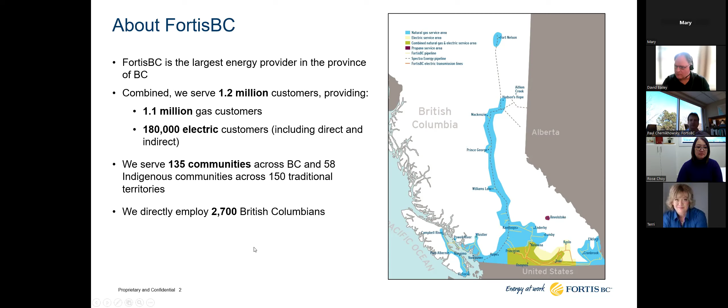So conveniently, FortisBC is both the gas and electricity supplier for the Kelowna area, and that gives us a unique insight into energy use by the customers in Kelowna. If you're not familiar with the city, it's about a 4-hour drive northeast of Vancouver, in southern interior BC. Not a huge city, but with a population of just under 150,000, it's still the largest urban area in the BC interior. All the electricity used in Kelowna comes in over 3 230-kilovolt transmission lines.

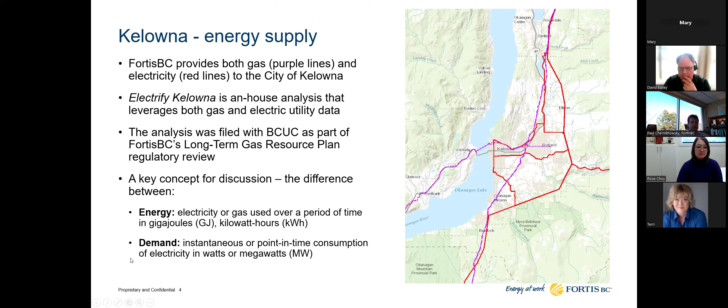Because on the next slide, David, we've provided some actual consumption information for the Kelowna area from 2020. It's a typical year. And to make the gas to electric comparison easier, we've also done the conversions to convert gas, which we typically measure in petajoules, PJs, to electricity, which is measured in megawatts and gigawatt hours.

Now, I'm not going to go through all the numbers on the slide, but if you look in the total area, an observation I'd make is that even though we have only 2/3 the number of gas customers compared to electric, roughly 44,000 gas customers to 76,000 electric, collectively those gas customers use more peak and annual energy than our electric customers.

In decarbonization discussions, a lot of time the conversation tends to focus on annual energy use. For example, can we replace the energy provided by conventional methane, natural gas, in any given year with electricity from greener sources, maybe wind or solar or hydro, geothermal, what have you?

But what's almost always forgotten or ignored in that conversation is the infrastructure needed to meet the utility's peak demand. In BC, and in fact for most of Canada, those electric system peaks occur during our temperature extremes. In the summer, due to air conditioning load, or more importantly, the winter, on those cold, dark winter evenings, almost always between about 5 and 6 p.m. And that's a much more challenging discussion, and it's the focus of our presentation today.

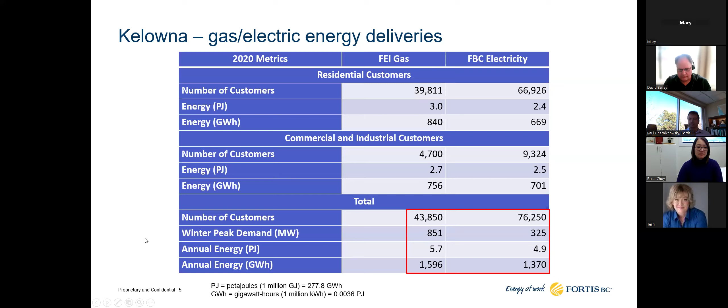Okay, so with that context, I'll turn it over to David now. Sorry, lost in my notes here. David, go ahead and show us how your model works. We've done this before. Yes, we have.

All right, thanks, Paul. So internally, I was fooling around with some data here, and what I'm going to do first is just explain what we're going to see in the model. It'll help a little bit when we start manipulating the model. The model is running live, runs in a browser, so we will be actually using it live today. It's not a bunch of screenshots. But anyway, I'll set this up.

So what we have on screen here is a thing that we at Fortis call a scatter plot. You're looking at 3 years worth of data ending in 2020. If you counted them, you'd count a little over 1,000 dots on the screen. This is the peak gas usage for each day of the year for 3 years, plotted against the average daily temperature. So we notice a couple things.

First of all, at the right-hand side, at temperatures about 15 degrees Celsius and warmer, the dots really flatten out. That is representative of the hot water load, or load that isn't used for space heating. But as soon as it gets colder than 15 degrees, the dots climb up the page very consistently. Every time it gets a little bit colder, our customers use a little bit more gas, all the way out to minus 17 degrees, which was the coldest temperature recorded in the 3 years worth of data shown here.

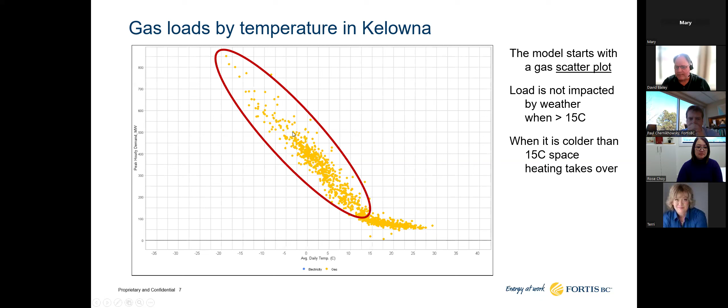So over time, and the essence of this model is to manipulate these dots to play kind of what if. Over time, these dots could shift up the page - at any given temperature, the dots could be higher if customers or the population of Kelowna increased. But they could also shift down the page at any given temperature if customers in Kelowna improved the building envelope, for example - if they put in more insulation or replaced doors, windows, et cetera, then at any given temperature, you'd expect these dots to shift down the page.

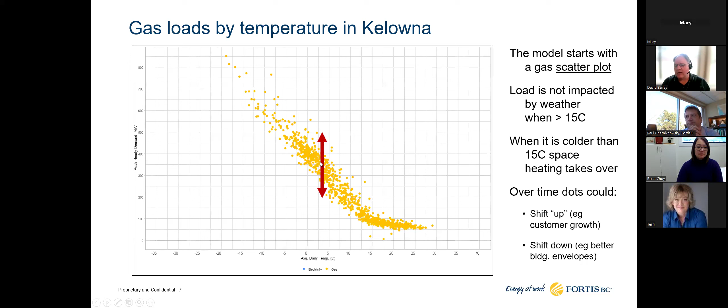What we'll be doing today is manipulating a chart that looks a lot like this, and the dots will be shifting up and down the page, and we'll see what happens when we make different assumptions about the future.

Now, the other thing I should mention here is that when we get these dots, we fit a line through the middle of them, or the software does - I don't do it, the software does it. The question is then, well, how far out should we stretch the line? Because, well, this dot here was the coldest temperature we recorded in those 3 years.

It's certainly not the coldest temperature we could experience. So what we do is establish a design temperature using Environment Canada weather data, and we design to that. In this case, it's out at point number 2. For Kelowna, that design temperature is about minus 26 degrees.

Every time we do this, regardless of where the dots end, we stretch the line out until it hits minus 26. Of note, on December 22nd, 2022, we recorded minus 26.2 degrees in Kelowna. It happens once every 20 to 25 years, but that's what we have to design for. We have to assume that in any given winter we're going to get an event like that, a polar vortex.

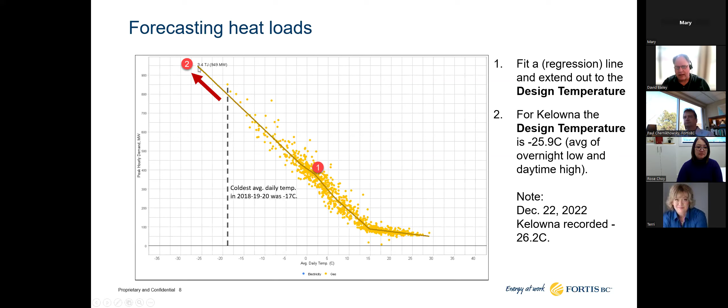We're going to have to design our system to provide electricity to customers when it's that cold. So then the other thing I can do is add on the electric system. As Paul said, the convenient part about doing this in Kelowna is that we have the gold dots and the blue dots. But of course, the first thing you notice with the blue dots is there are 2 peaks, one in the summer for air conditioning, one in the winter for heating.

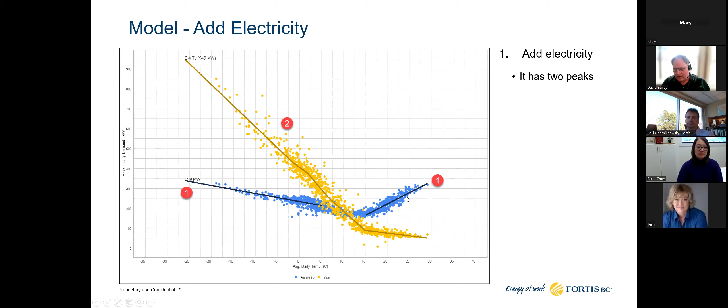It's significantly less, as Paul said, we deliver more gas energy than electric energy, but we do stretch it out to the same design temperature in the winter, and we don't see the flattening in the summer. So on colder days, most of the energy comes from the gas system.

When we look at this kind of stuff, what we're going to be doing today is trying to convert the gas load into electricity, right? So it's called Electrify Kelowna. That'll be the idea. One of the things that will be critical to this whole piece is the role of heat pumps in that conversion, the idea that heat pumps are more efficient than a gas furnace.

So if we convert gas heating load into electricity, heat pumps ought to play a significant role. As Fortis, we contracted a field study of our customers by a consulting company, and they looked at about 24 or 25 of our customers that had a heat pump installed, put all kinds of sensors on them, and did a report for us.

In that report, the heat pumps were grouped into 3 broad categories, and you'll see in a minute those are modeled in the application, so we can see what would happen if there was widespread adoption of low performing, mid performing, and high performing heat pumps.

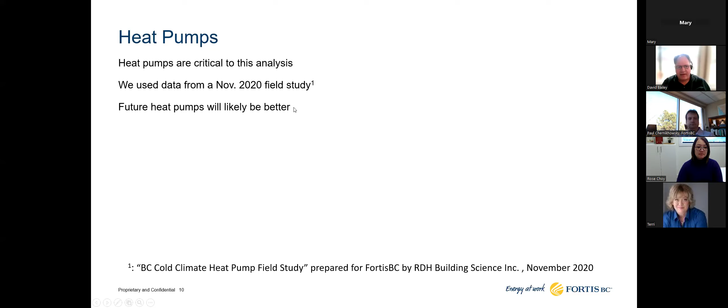We presented this to some audiences, and one of them said, hey, but we're going to be looking 20 years out today. Heat pumps 20 years from now will probably be better than the ones available today. So we've actually included some hypothetical heat pumps about maybe what will happen in the future.

A critical thing to keep in mind about heat pumps is that in warmer weather, closer to 15 degrees or so, they perform better. They have a thing called the coefficient of performance, and that changes with temperature. As it gets colder, they become slightly less efficient, and that's also critical to what we'll see in the model today.

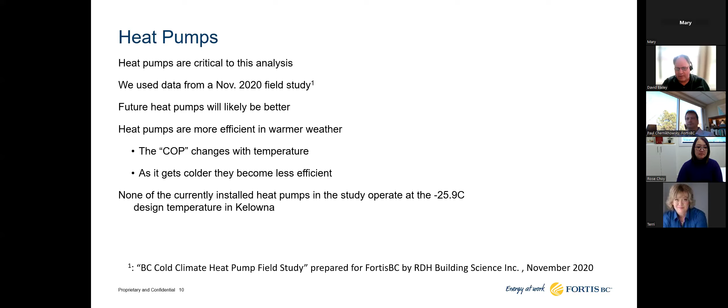More importantly, none of the installed heat pumps right now in the Kelowna area that our consultant looked at were able to heat more efficiently than a baseboard heater at the design temperature. So by the time we get to the design temperature, those heat pumps are basically operating as baseboard heaters.

So anyways, we have this interactive software application. It's got this awful name called Slider Tool, but I can't help that, it's just the nickname it got. And we are now going to jump over to it, hopefully here.

Is that all visible to everybody? Yep, it's there, David. That's good.

So here it is, and I'm going to just talk about a couple things on here. First, you see a bunch of red lines, the vertical ones ought to be obvious. These are those design temperatures I spoke about, so that's going to be kind of the goalpost there. We're going to fit everything inside of that.

But there's a horizontal line here that's new, and this horizontal line is the capacity limit for the Kelowna area right now.

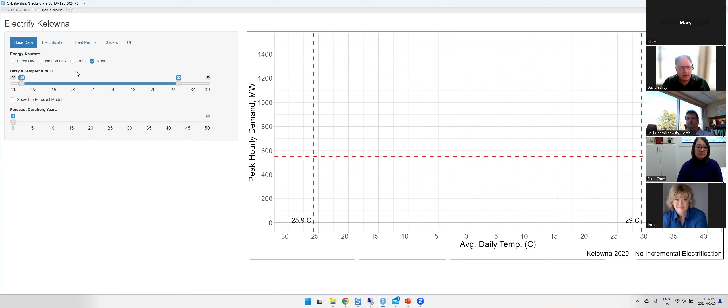So this is the limit of what we can deliver into Kelowna. When I turn on the gas dots and the electric dots, that ought to look familiar - that's the same stuff that created the slide. The gold is the gas, the blue is the electric. If I turn on the forecast model, we'll get those lines through there and they'll stretch out until they hit these vertical lines here.

So the objective of today's exercise is to see if we can convert this gas load, these gold dots, into blue. We want to take all the energy contained here and move it over to the electric system. But when we do that, the constraint is we don't want to go above this red dashed line. As Paul will explain in a minute, if we exceed this line, there are some seriously significant cost implications for us as a utility. So it's critical that whatever solutions we come up with respect the tip of this line, not crossing this threshold.

This is the data as of 2020, but we're going to be looking out 20 years - we don't need to model it for today. What we need to look at is what's going to happen 20 years from now. When we change these sliders, it'll manipulate these dots up or down the page. In 20 years, more people will live in Kelowna, presumably. So when I click on this slider at 20 years, these dots will slide up the page, the lines will get refitted, and the numbers will change. Here we go - everything shifts up the page a little bit and these numbers go up. Now it says Kelowna 2040, and this is what we expect things to look like in 2040.

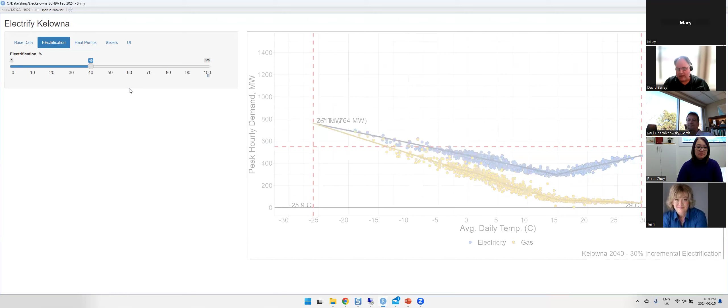But you can see what happens now, right? We get to 50% - the gold dots are coming down the page, the blue dots are going up. Obviously, we've now surpassed that capacity limit. By the time we get to 100%, the gas system now is providing no energy, so our greenhouse gas emissions are 0 - they've gone right to 0.

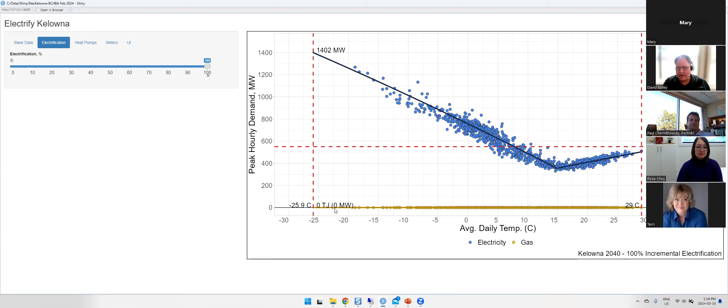There's no gas used anymore. All of the energy that the gas system was delivering is now shifted over to the electric grid. Unfortunately, our peak is now 1,400 megawatts, so we blew through the 550 megawatt limit. And this right now, if we left it like this, would represent some significant cost - Paul will go over in a minute, but measured in billions just for the residents of Kelowna.

Now, when I converted this load over, the first basic assumption is that all the gas furnaces get pulled out, gas connections are turned off, and the hot water and furnaces are replaced with electric equivalents - in this case, all baseboard heaters. So this is the starting point, and we know this isn't what's going to happen. People are going to put in heat pumps, and that ought to help us with this curve.

So we have data from our field study about what happens to this load when we replace those baseboard heaters with heat pumps. The consultant grouped the field study into 3 broad groups. We start off at the low end with the mini splits. When I turn this on, you'll have to watch quite carefully. When I click on this button, these mini splits - again, it says assumes 100% adoption - this means that in 20 years, every single home in Kelowna has a mini split.

You'll see these dots down in this lower area shift downward. So here we go, when I turn that on, you'll see this line bend.

But at about 0 degrees Celsius, this mini split stops providing any benefit other than what you'd get from a baseboard heater. At that point there's a kink, and from there out there's no impact. So Fortis is still on the hook for 1,400 megawatts, even though everybody's put in a mini split. It helps them because as this line bends down, that represents energy savings to the consumer. That's good, but unfortunately for the utility, we need to still plan for that very cold day.

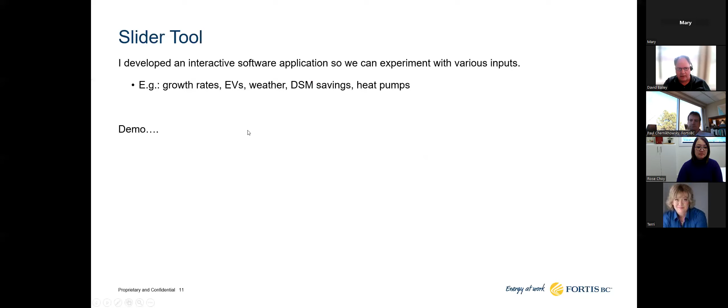And with that, I'm going to pass it back to Paul just to discuss some of the numbers behind this. See if this goes back here. Yes. Over to you, Paul. Thank you, David.

So we'll come back to the model again in a bit, because I'm sure you have some questions about what are some other adjustments we made. There are things that we can play with, so we'll look at that. But if nothing else changes, if right now we exceed that 550 megawatt limit, what happens?

It does allow for some amount of reasonable expansion as well, but you very quickly hit a point where to expand the system beyond that, you need significant reinforcements, and I'll talk about that in a second.

For some context though, for comparison, currently for Kelowna, the record winter peak demand for Kelowna is about 370 megawatts, and that occurred on the date that David mentioned, December 22nd, 2022. So that's the winter, 370. For comparison, our summer record peak is actually slightly higher, at 385 megawatts. So this area of our system is actually now what we call dual peaking, or even slightly into the summer peaking range.

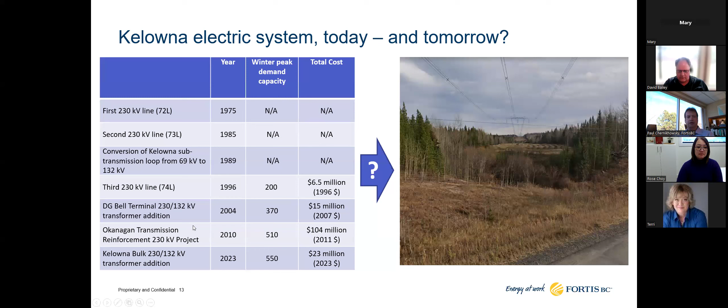I think anyone who's built new infrastructure in years knows all about the impacts those projects cause. There's the increased capital investment that will put pressure on rates paid by our electric customers. And the construction of new lines and substations impacts the environment, the public, and Indigenous groups.

For comparison purposes, the current regulated rate base of the entire FortisBC electric utility—so our generation, transmission, fleet, facilities, you name it—is about $1.6 billion today. So we're talking about a doubling or more of the investment in electric infrastructure to meet this kind of peak demand. And that's just for Kelowna. Presumably something would be happening similar elsewhere in our system and the rest of the province that would be driving this.

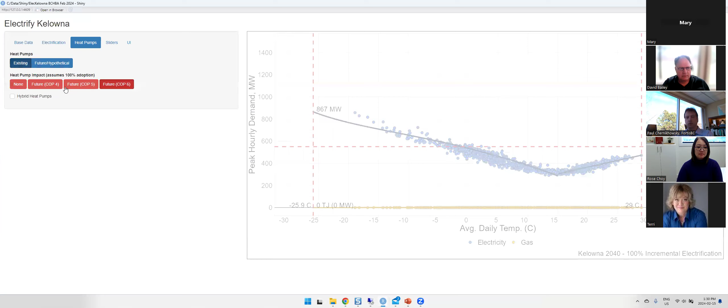Next slide, David. Of course, that raises two natural questions. Well, okay, what can we do about the problem? And are there feasible and plausible scenarios that will allow our peak demand to remain below that 550 megawatt limit while reducing the use of conventional methane and hence GHG emissions? So I'll turn it back to David and we'll explore some more scenarios here.

All right, thanks, Paul. So as Paul said, we can't leave it like this. We've got to figure out what are the solutions, what are the things we can do to bring this peak down below this line. Understanding now that this line really represents $2 to $3 billion of investment for a fairly small customer base.

So there's another tab here, and this one is pretty complicated, but this is where the application gets its name. All of these sliders manipulate these dots, so we can fool around with some of these to see what we can do to try and bring this down. I'm going to skip a bunch of the top here. The first one of interest really is this one called gas residential UPC.

Really this is a measure of the average building envelope in the city of Kelowna. Right now the average customer in Kelowna uses 71 gigajoules of gas, and that reflects their building envelope. Customers on Vancouver Island use about 51, so quite a bit less, obviously a warmer climate. But what if the residents in Kelowna really stepped up? We had DSM programs to improve the insulation. What if we drove this number down to 36, cut it in half?

So you can see right away what happens, right? As we make the buildings better, they use less energy and this peak comes down. That's a pretty good hit, it brought it down quite a bit. We're still above the line, but it certainly helped.

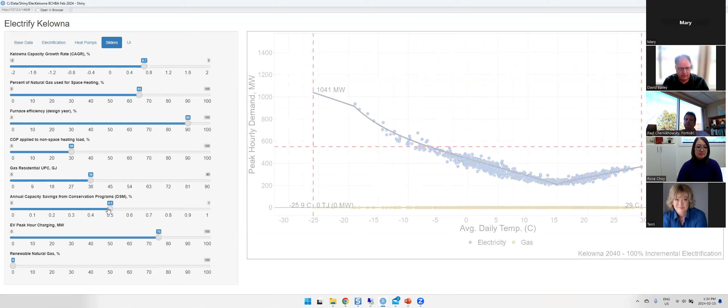Now there is one other way. I'm going to reset these sliders back down because there's one other solution we can look at here. I was going to put these back where they were, most of them. I'll leave the building envelope one where it is.

When we were on the heat pump tab, we were looking at these heat pumps that are installed today, but there was a checkbox down here for hybrid heat pumps, and we didn't play with that one. I'm going to turn these on now. A hybrid heat pump is a heat pump that has a gas backup furnace of some type in it, and the gas portion can be used in colder weather. So when I click on this and turn this on, the chart is going to get a bit messy, I'll tell you right now.

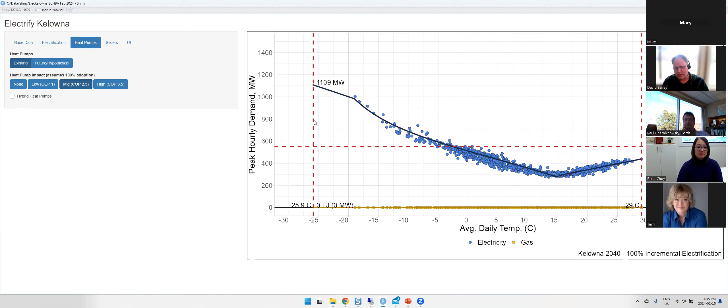So what we'll see happen is the dots are going to go away and we're just going to be left with the lines, but the dots are there, it's just too messy to show them. So here we go. When I turn this on, we see the same lines as we saw before.

The hybrid heat pumps have this concept of a cutover temperature, the temperature at which they cut over from operating in electric mode to operating in gas mode. So I'm going to pull this slider way down to 6 degrees Celsius. Right away, we see what happens is those heat pumps work until it gets to be 6 degrees. At 6 degrees, the electric portion of the heat pump shuts off.

This curving line here is the base load, right? Lighting, TVs, iPad chargers, all that stuff. And now the heating load is picked up by the gas system. But now this peak here is well below our threshold.

So what if we cut these over and understand that the longer this line is, the more days you're going to use gas, and therefore the more gas you're going to use. But if I start sliding this slider to the left, we see the lines creep over to the left. The further left we go, the less gas we use, the less GHGs we emit, and we get just to a point where that blue line touches the red dashed line, and we have a solution here.

The cool part is, though, that now we have a bunch of tools in the toolbox, right? We can go back here to these other drivers and we can say, well, hey, let's go back and reduce that EV charging. And down comes the curve.

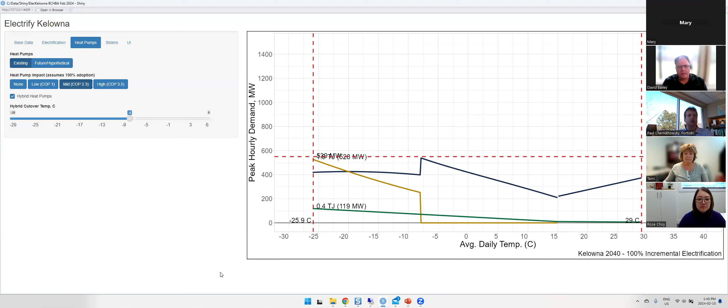Absolutely, that's an improvement that David is busily working on for Electrify Kelowna version 2, the slider tool version 2. You can see here, in the version on your screen, there is electricity use, which in BC has a very low carbon intensity, though it does have some. And there's the use of some conventional gas, so you'd be able to calculate the amount of gas.

It's essentially what we refer to in mathematical terms as the integral under the curve, under that yellow curve. So as you move the sliders around, you'd be able to calculate the resulting GHG emissions from that scenario. You'd be able to play with those sliders and find an optimal point, where here's what the emissions would be, and here's what the infrastructure costs to support that would be. So that is an improvement we are already looking to implement in the next version of the tool.

Okay, we got a bunch more coming in here. David, do you want to take any of these? I can't see them without, well, I'm sharing my screen. Oh, that's right, okay, never mind that.

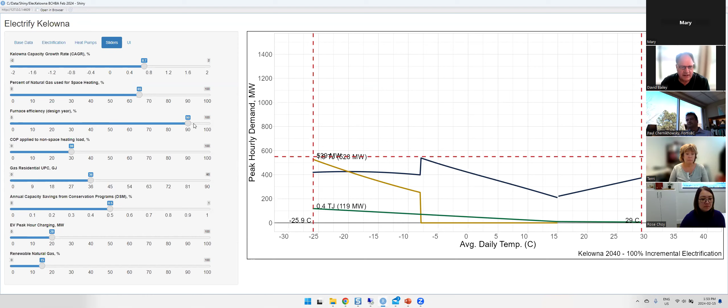Yes, we did take that into account. So the model does have a slider here for furnace efficiency in the design year, currently set at 90%. The interesting thing about this, though, is that the lower the efficiency of the furnace, or of the installed base of furnaces, right, that's all the really old ones, like I have, mine's I think 25 years old, and the much newer ones. As those furnaces are operating at efficiencies far below their nameplate, then the heat coming from that gas usage is what the electric grid needs to replace.

So actually, if we overestimate the efficiency of the installed furnaces, in other words, if they're performing worse than we think, then the amount of electricity you need is actually less. If the furnaces are all at 99 or 98%, then you've got to convert all that energy over. So that's a slider in here we can manipulate. Right now it's set at 90%, assuming that's the base. But as that slider goes up to 92, 95, or 98, the amount of electricity actually goes up, because that means most of the gas energy is being converted into heat.

Hope that helps. And that's a good note - again, David's model is looking at the gas energy input. It's not necessarily the gas heat output, right? Because we have no idea what that is. We don't know what our individual customer furnace efficiencies are. And that's why he's saying that yes, we do need to make an assumption.

We have recently got approval now to install automated metering at all of our gas customers. So we're going to be going around to all 1.1 million customers, removing your meter, putting in a new electronic meter. It uses ultrasonic technology to measure the gas flow and communicate that information back to FortisBC. That will give us much better insight because we'll be able to see, on a customer by customer basis, hour by hour, how you're using gas. And from that, we'll be able to better determine the efficiency of your appliances downstream and better improve our modeling as well.